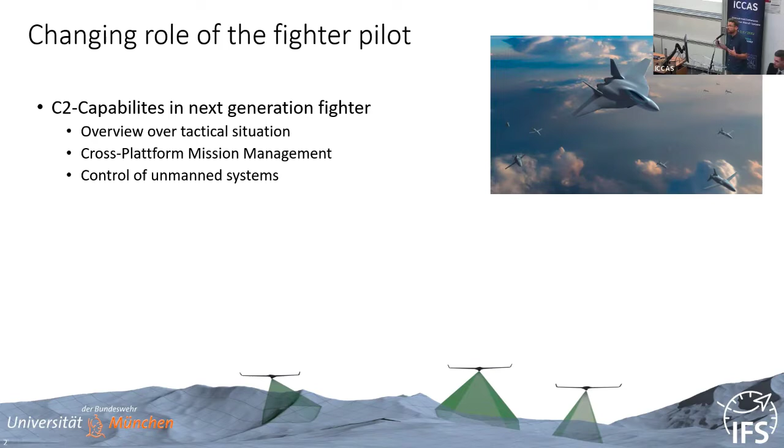So when you look at the development programs of the next generation fighter, like FCAS or Tempest, there's always this vision that the pilot is going to have more C2 capabilities, so more command and control capabilities in the cockpit, which means that he needs an overview of the tactical situation in some way, which means that he needs to have the capability to manage a mission across platforms, and also this vision of manned-unmanned teaming. So the pilot is controlling unmanned systems from aboard the aircraft.

What does that mean for cockpit design? That means for cockpit design that we're going to have high information load in the cockpit, so the display has to be designed for that. We will see increasing automation, so there will be less manual control, and eventually system and mission management becomes a primary task. So we had a discussion in this event already with a pilot who said the pilot is not flying anymore, he's more like managing the system. He's a system manager, not a pilot anymore. Pilots don't like it, but I think it's going to happen.

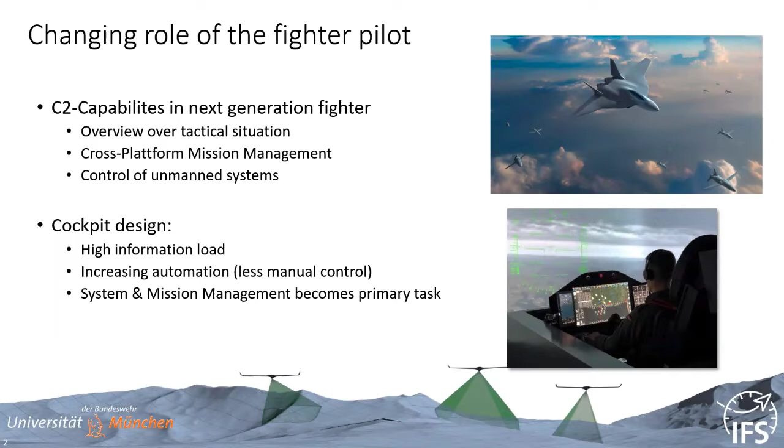So we as human factors researchers know this, there are going to be problems in the interaction with automation, especially with complex automation. And some phenomena are things we heard before, like attentional tunneling, the vigilance performance decrement, so fatigue, complacency and overtrust, inattentional blindness due to workload peaks, stuff like that. And a consequence of a lot of these phenomena is that there is a suboptimal distribution of visual attention in the cockpit. Also of auditive attention, obviously, but that's not my topic.

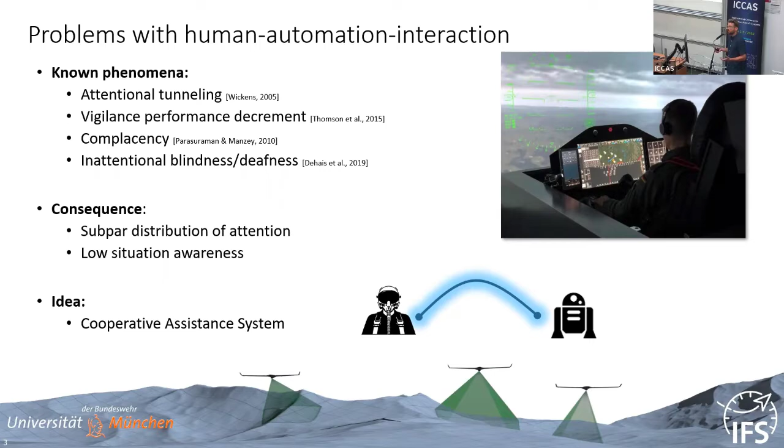When you think about the result of this, it's mostly that the pilot is not aware of the current state of the system. He's not aware of the situation, so he kind of has low situation awareness, which is the degraded mental state we're going to talk about. And well, Professor Axel Schulte introduced the concept yesterday. One idea we are trying to achieve is that we have a cooperative assistance system that's supporting the pilot in this complex task of managing his mission and his system.

So what are the traits of cooperative assistance? It was mentioned yesterday. There's no explicit delegation, so it acts on its own initiative. But more importantly, for this session, it observes the pilot and estimates the cognitive state of it, and then adapts to it. And when you think about these adaptations, you can define different strategies. So you can maybe just adapt to the situation, which is the simple one, but you also can adapt to things like workload, attention, and in my case, I want to adapt to the pilot's situation awareness.

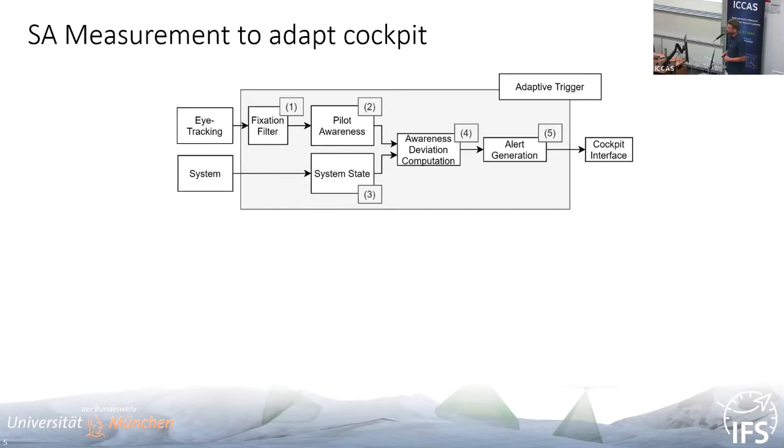So in the last years, we developed a tool chain that is trying to estimate what the pilot knows about the state of the system. And in my case, we are using eye tracking for estimating the visual attention. Well, the cockpit is a visual workplace. There is the auditive task as well, but it's dominated by visual tasks. So we start with eye tracking, and from the positions the pilot is looking at, we're trying to infer what information is displayed there. So one requirement for our approach is that you have a very high resolution eye tracking system, and you also can infer the state of information that is displayed at the moment of fixation.

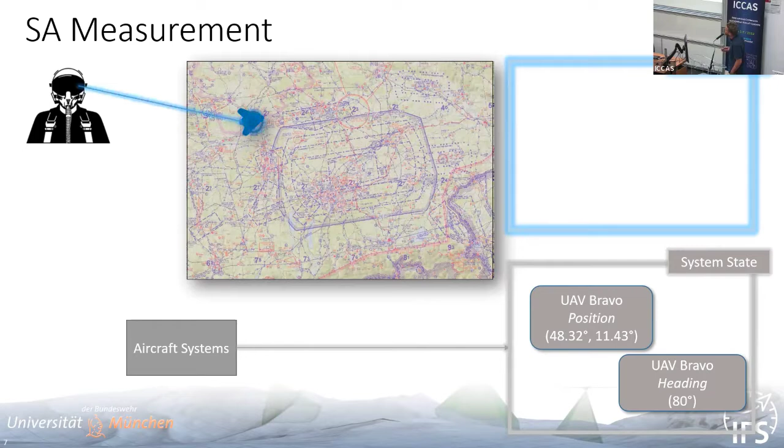The next step, when you know what the pilot fixated, is you can try to estimate what his knowledge, what his awareness is. There is, of course, the simple assumption that everything the pilot fixates, he perceives, which is not right all the time, but most of the time it works. And when you have that information, you can make such an assumption that when the pilot has a tactical map in front of him and he fixates the UAV, then what is encoded in a UAV symbol on a map? Well, the position is encoded, and through the rotation of the symbol, the heading is also encoded.

So we kind of assume at this point, okay, the pilot is aware of the position of the UAV Bravo and of the heading. And when we continuously do this in the aircraft system, so software-based, we can continuously generate a similar model of the situation, but a thing like a ground truth. So here on the bottom, we continuously do the same thing for the system.

So when the pilot attends something else, and for example, the UAV moves to another position, the system state changes, and now we can compare these two information. So the thing we think the pilot knows and the actual state of the system.

So when you think about situation awareness, in my opinion, it's important to note that this is always information specific. It's always tied to the domain. So you can't speak about situation awareness without a domain. There's no number between 0 or 1, which is high or low situation awareness, but it's always tied to information of the system or of the task context.

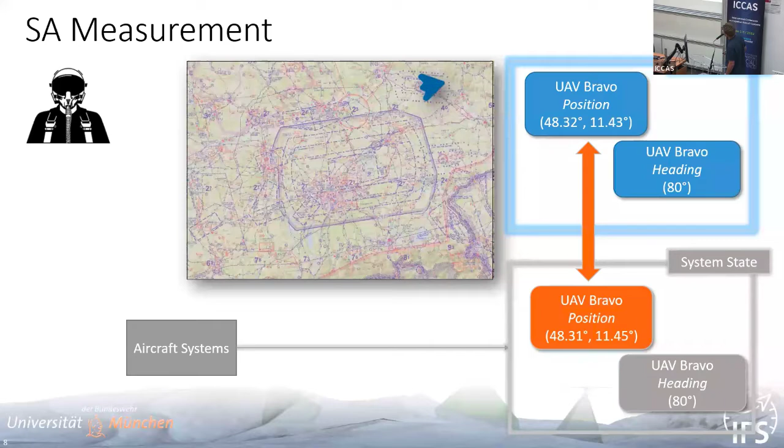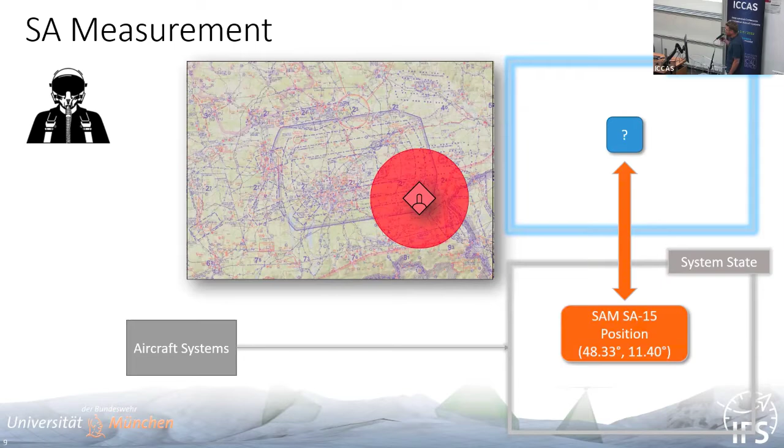Another example, simple one: when, for example, a pop-up SAM air threat pops up, the pilot has not looked at it. Maybe he knows it's there, but he definitely doesn't know where it is. So we have kind of an estimation of the awareness. It's maybe just level 1 awareness, if you want to think about it in that way. So he didn't perceive this information.

And now, when we have this information about the pilot, about the system, we can use it to trigger alerts, to trigger adaptions in the cockpit. So this is an important step of our research. We try to close the loop and bring it into realistic or synthetic task environment.

So this approach worked reasonably well in laboratory tasks. So not easy, but simple pilot tasks, like tracking a route or something like that. So one question remaining after we evaluated this was, okay, what are information that are relevant in realistic use cases for a fighter or even in a MUM-T environment?

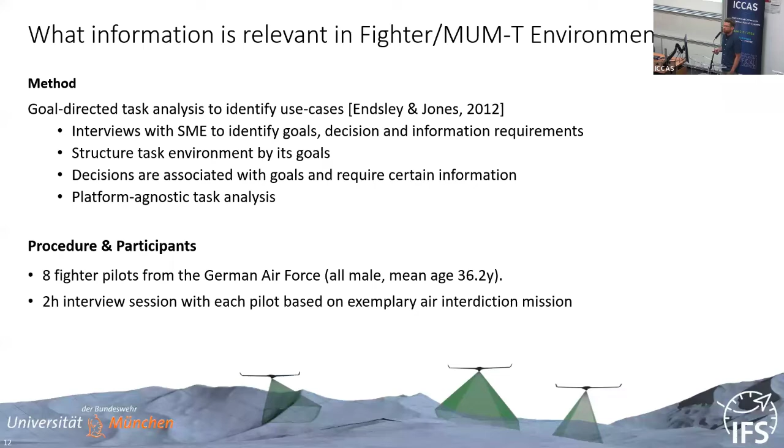So what we did is we performed a goal-directed task analysis to identify which information are relevant in which situations. For this, we interviewed 8 fighter pilots from the German Air Force, each pilot 2 hours, based on an exemplary mission. And the result, well, it's not complete. It is like a big hierarchy. Just a brief overview: there are 5 main goals for the fighter pilots.

These things are obvious in retrospective. You have to operate the aircraft. You have to execute your mission task. You have to evaluate your mission plan, supervise unmanned assets or manned assets. Currently, there are only manned assets to supervise for a fighter pilot, but in the future, maybe not.

And communicate with C2. And the whole idea of the analysis is to break down this whole goal structure until you reach a point where you can't define a goal, but you have to make a decision. So the pilot is continuously making decisions in the cockpit, subconsciously or consciously. For example, is change of heading necessary to capture the desired flight path? And now in the analysis, you try to structure, okay, what information does he really need to make that decision?

And I think the important part about the analysis is that it's not really dependent on the platform. So you should not focus on a display element or something, but you should focus on the semantics of the information behind it. So in this case, the planned route and waypoint should be known, also the current position of the fighter and its heading.

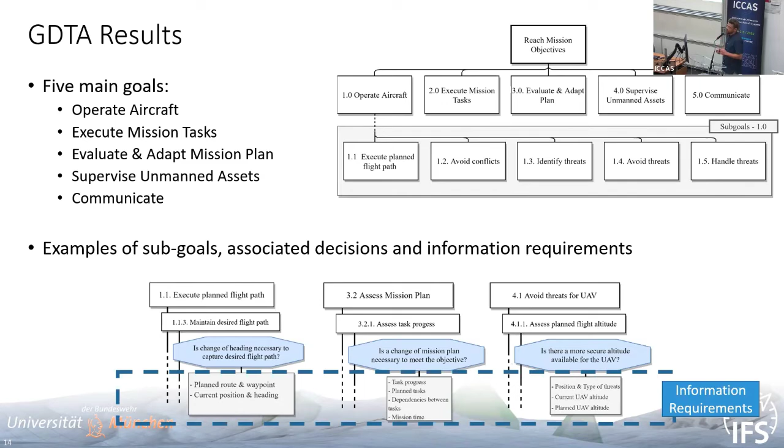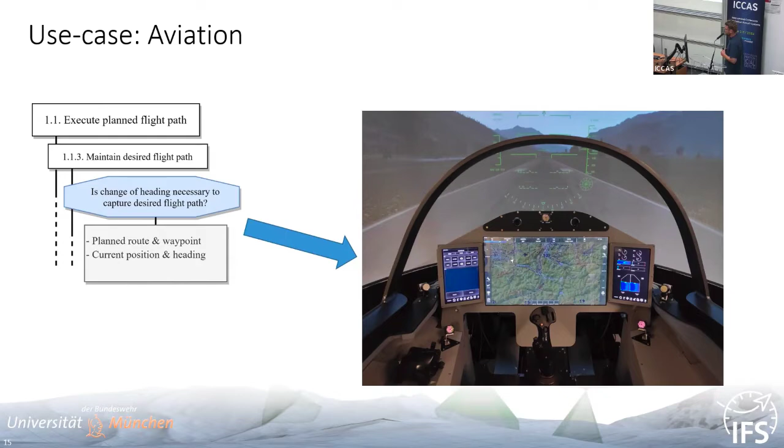And then after we conducted this whole analysis and generated the structure, we selected a few use cases and brought that into the simulator. So we tried to implement this whole loop for a few use cases. And I have brought a video of this simple example with the route tracking.

So on the top left, you see the HUD, and on the left bottom, you see the tactical map. There's a route, so the pilot has the task of just tracking this route. And this is kind of the live view of the cognitive state estimation. In the video, there's not much happening because the pilot, you see in white, is kind of focusing outside because he's controlling the autopilot. It does not behave as he expected. So he's really focused on getting the autopilot to do what he wants.

And now he just loses track of the new waypoint of the current route. And this live estimation knows this already. These nodes are gray when there's a high deviation between what the pilot has perceived versus the system state, and a few seconds after the route deviation got too high, it will issue an alert, so the pilot will have a visual alert and also an auditive alert. Yeah, that's the one.

So we implemented this and other use cases, and had three fighter pilots in 3 missions. Unfortunately, not enough time to talk about every mission in detail. But I think I want to discuss one thing about the experiment.

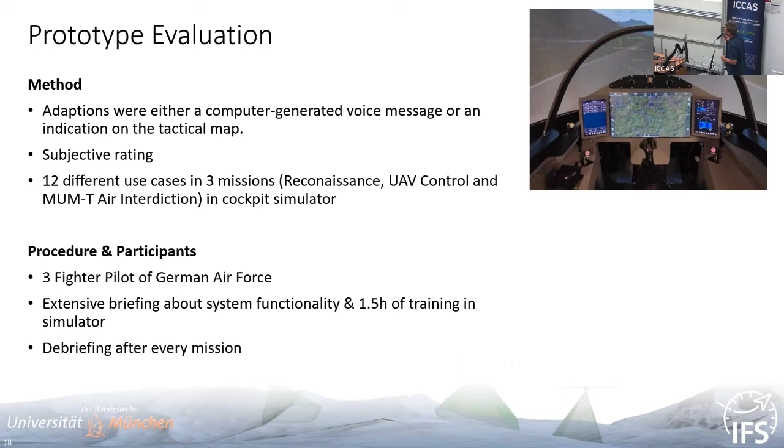So in this case, we also extensively briefed the pilots about the system functionality, which had one interesting result in the end. Also 1.5 hours of training and a debriefing after each mission. And I just summed up the key points. So the adaption was accepted well. With 3 fighter pilots, there's not much statistics to do, but more observations and comments by the pilots. They considered most use cases to be useful, but they criticized more or less the design of the interaction.

So visual adaptions were preferred to auditive notifications. I think mostly because the visual adaption is there for a few seconds, or for, I don't know, 10 to 15 seconds, whereas the auditive notification is there and then it's gone.

And this is the interesting part, I think. So in a few situations, the pilots did not monitor some part of the system because they knew, even if I don't monitor it, the system is going to tell me. In this case, it was a message which was going to tell the new route, the new altitude to track. And one pilot relied on just the system telling him. So he kind of worked together. I don't know if you can call it a work agreement, but the pilot knew how the system behaved, and he used that.

Another thing we just heard also had effects in my experiment. When workload is high, pilots ignore system indications. That's a normal thing. So we have to think about timing of intervention and design of intervention. And further, pilots disliked indications that merely told them information they should know from a perspective of good SA. That means when pilots see a notification, they expect that they have to do something about it, that there's some kind of action. And just telling them, here, I think you should know that, was not well perceived by the pilots.

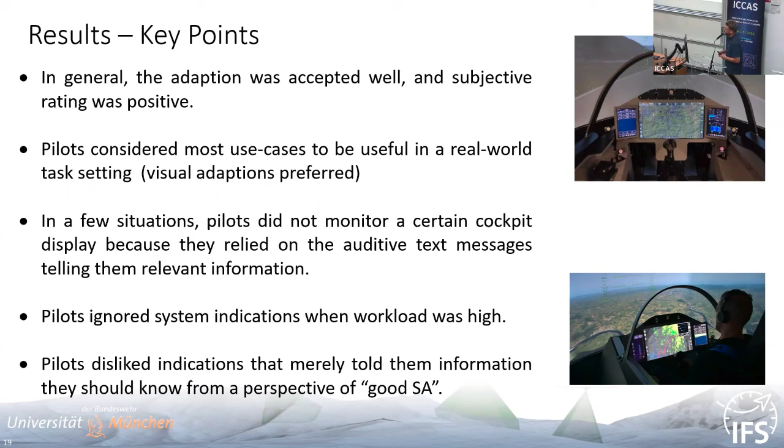So the conclusion is, the task analysis part is helpful to get to know the domain in general. And it's a good fit for this approach specifically because I'm looking at the information that is relevant. We had overall positive evaluation, but there are 2 open issues I think we should concentrate on right now, and that is the timing of intervention. So we should think about, is the intervention critical? Then obviously you should intervene immediately, or when it's not critical, you should wait until the pilot can be open for that thing. So you may need another observation module that observes when the pilot is ready for something like that. So another observation part, okay, new complexity.

Second thing, the design of intervention. If the intervention is critical, and in the panel discussion yesterday there was, I think, a good idea: when it's critical, you need to bring the pilot out of his focus. So you maybe need to black out the screens and write 'you are stalling.' This was the example yesterday. And I think there is something like cognitive countermeasures, which was here at SUPAERO, I read a paper about. So these are like new interventions, maybe very severe interventions, if it's critical. And if it's not, then it should not be so critical in the design, obviously.